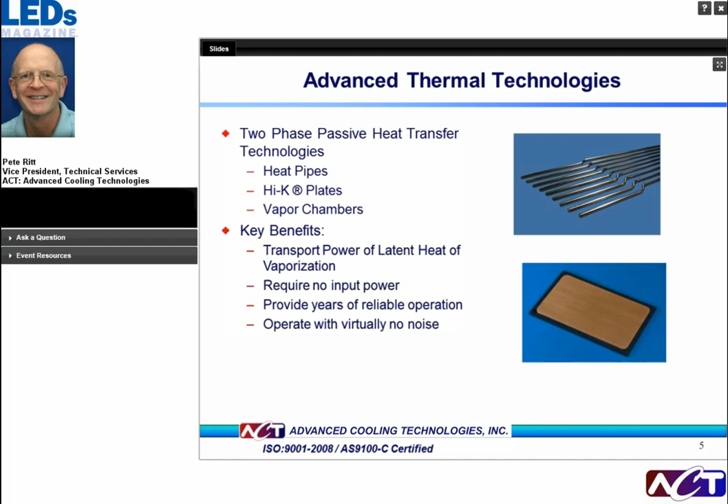First, we'll look at heat pipes. Heat pipes are sealed vacuum devices. They are housed in a metal tube. Inside the tube is a wick structure and a small amount of a working fluid. Most applications are copper tube, copper wick, and water as the working fluid. But there are several other envelope materials, wick structures, and working fluid combinations.

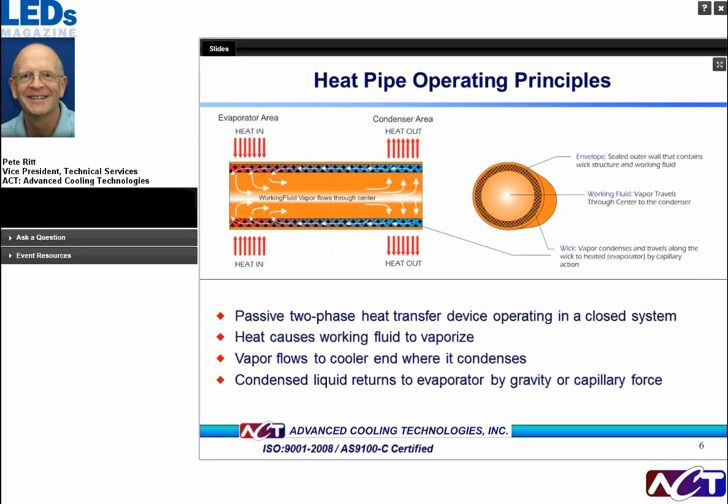So now that we know a little bit about heat pipe operation, let's look at how this can be put to use. First of all, with different combinations of envelope materials, wick structures, and working fluids, heat pipes can be used over a wide temperature range, from cryogenic to liquid metal, from -150 to 1500 degrees C. Because they are sealed vacuum devices, some working fluids can operate well beyond their nominal boiling point. Water, for example, can be an effective working fluid from 20 to 250 degrees C.

By controlling the amount of working fluid and selecting the appropriate wick structure, heat pipes can restart operation after freezing. They are freeze-thaw tolerant. Also, with the right wick structure, heat pipes can operate against gravity. That is, heat pipes can transfer heat downward. Typically, heat pipes can transfer heat around 8 inches against gravity, although gravity-aided operation is generally preferred.

In terms of advantages, since boiling and condensing are occurring at the same time, heat pipes can have an effective conductivity of 10,000 to 20,000 watts per meter Kelvin. We can contrast that with copper, an often used conductor, which has a conductivity of around 400 watts per meter K. Other advantages include continuous passive operation, excellent isothermality characteristics, and quiet operation. In terms of heat flux capabilities, heat pipes can operate with heat fluxes up to 50 to 75 watts, with custom heat wicks up to 500 watts per centimeter squared.

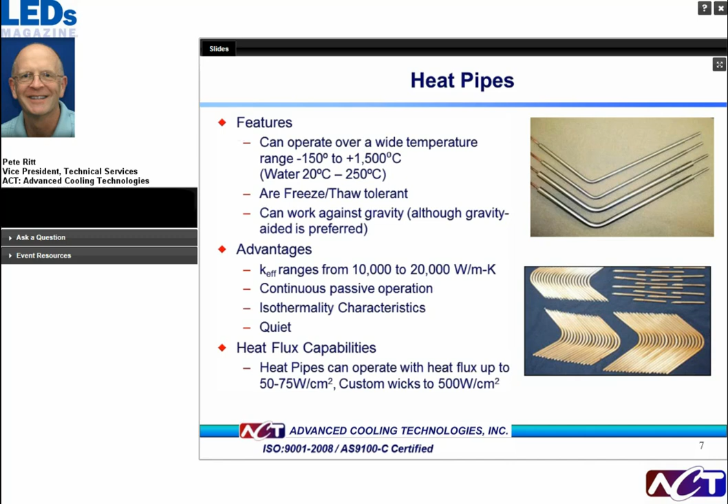So when should one consider using heat pipes? Heat pipes offer performance benefits in two main areas, heat transport and isothermalization, with heat transport including heat spreading. Heat pipes should be considered anytime high conduction gradients are a major portion of the thermal resistance. Removing waste heat that builds up on electronics components is the classical application for heat pipes and can be directly applied to LED devices as well.

In terms of benefits, heat pipes can be used to reduce the thermal management system size by providing more efficient heat transfer. They can also reduce system weight. Heat pipes are evacuated metal tubes which are lighter than similar sized metal rods. They can reduce required power. Heat pipes themselves require no power to operate and can decrease system hotspots without need for a pump.

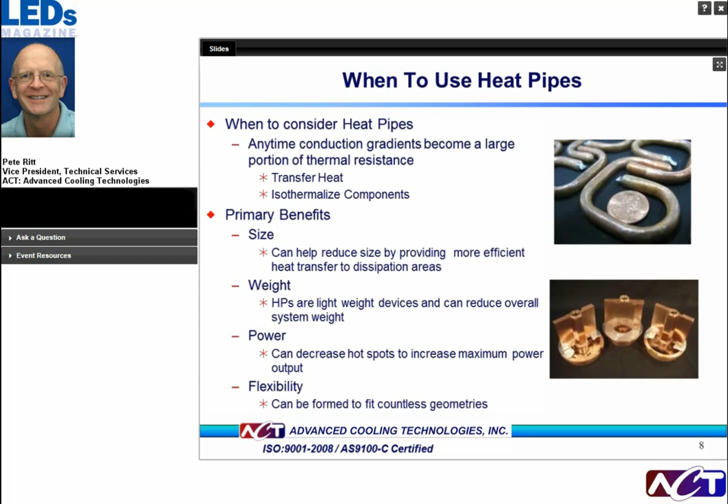Additionally, heat pipes can be used to move heat away from the inside of an enclosure to the exterior without subjecting the components to the outside environment. This solution can be implemented to dissipate heat from LEDs in sealed packages.

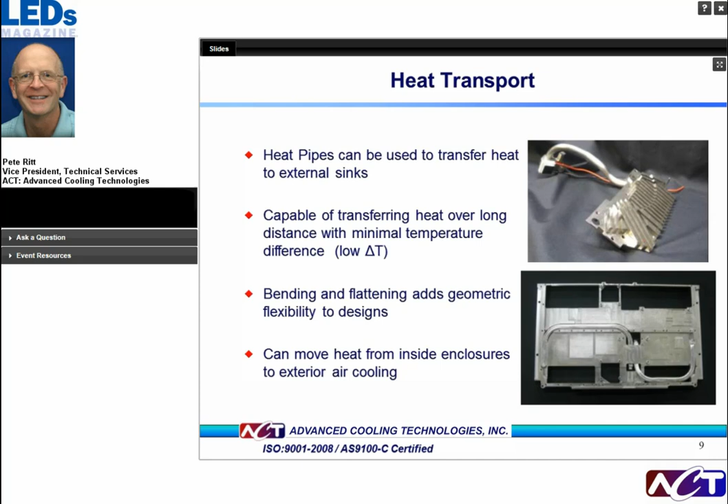The other major transport benefit of heat pipes is heat spreading. One specific embodiment of that feature is the Hi-K plate. Hi-K plates are aluminum conduction plates with heat pipes embedded in them. Aluminum has thermal conductivity of 200 watts per meter K. Typical thermal conductivity for aluminum Hi-K plates is 500 to 1200 watts per meter K, depending on the number, diameter, and location of the heat pipes.

High K plates, termed that because of their high thermal conductivity, can be used to reduce hotspot temperatures by moving or spreading heat to less critical areas. They can serve as enhanced conduction-cooled cold plates. They are fully compatible with either liquid or air-cooled chassis. They can be used to improve fin efficiency and lower fin weight.

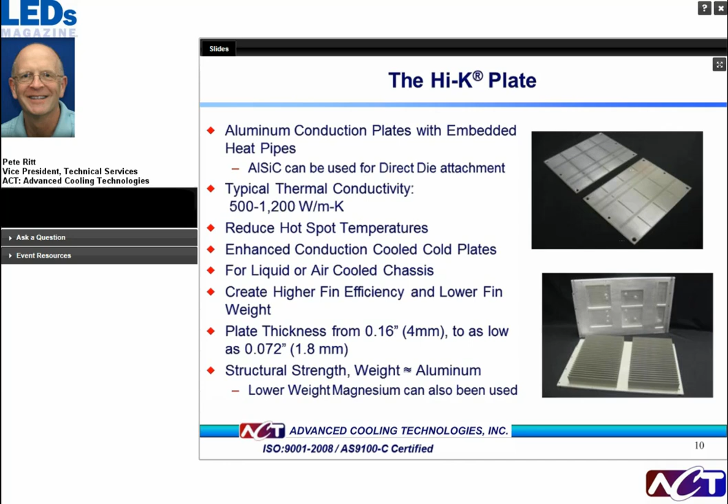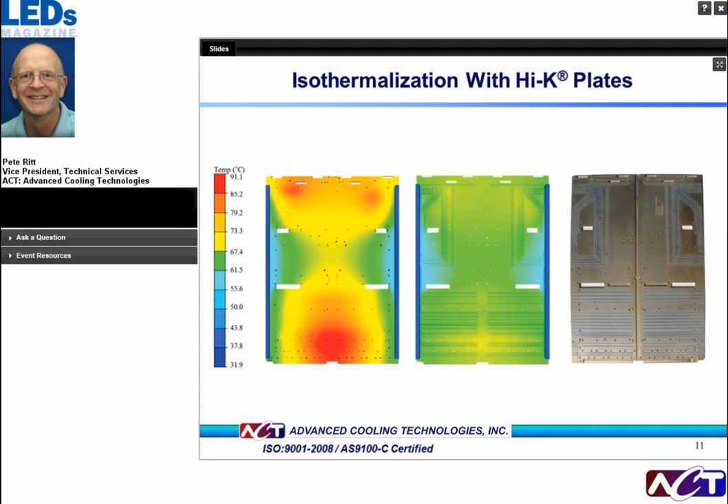Pictured on the right is the actual plate with the heat pipes embedded in it. The heat pipes can be seen as silver lines. This technology has many heat transport and heat spreading applications and certainly could be considered for improving thermal management for LED arrays.

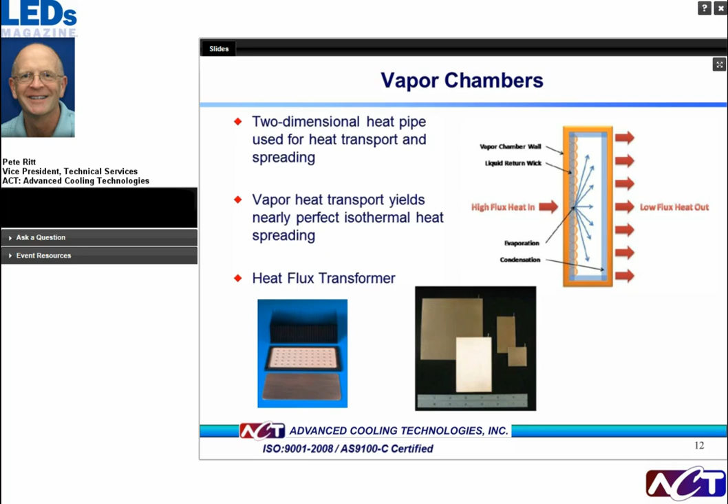Thank you, Maury. Now that we've learned a little bit about heat pipes, HiK plates, and vapor chambers, it could be useful to examine exactly how these technologies could be used as part of a thermal management solution for LEDs. In the following, we'll look at 5 different LED applications where they can be beneficially implemented. The first is the remote sink.

In many lighting applications, the LED device must fit in a fixed space to accommodate a variety of customer requirements which usually exclude thermal management considerations. A common example is a luminaire design where the ceiling or wall fixture are based on pre-existing designs using non-LED technologies. These designs commonly have both restricted space for heat dissipation through conduction and limited airflow to remove heat via convection. In cases where there is space to remotely dissipate the heat, heat pipes can be used to transport the heat from the device to a heat sink located elsewhere. This is called the remote sink.

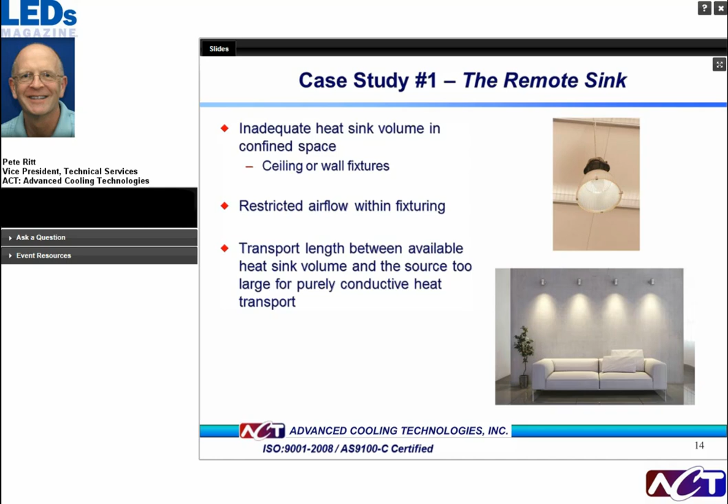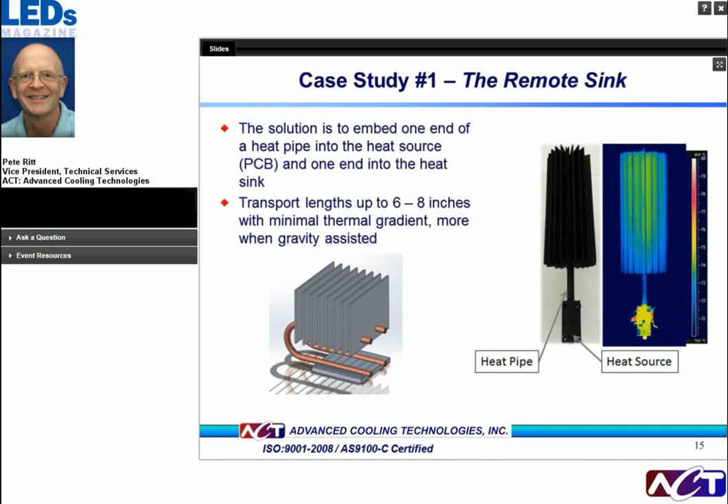In the example on the right, a single heat pipe is used to transfer heat from the source on the bottom to the heat sink above it. A thermal image on the right shows heat being transferred from the hot yellow LED device to the blue, green, yellow heat sink above it. The presence of the green and yellow within the heat sink shows that the heat pipe is effectively transferring heat from the device to the radial heat sink fins. Heat pipes can efficiently transfer heat approximately 8 inches against gravity with minimal thermal gradient, and even greater distances when gravity assisted. Note that the number, size, shape, and location of the heat pipes would be specific to that design.

Case number 2, extrusion isothermalization. In some cases, it is not possible or desirable to have a heat sink in a remote location, bay and/or outdoor lighting products, for example. Frequently, large extrusions, typically made of aluminum, are utilized. Heat dissipation occurs through conduction, resulting in large temperature gradients across the heat sink structure, with the highest temperatures found closest to the LED heat-generating source. As we have mentioned, the excess temperature has a negative effect on LED device life and performance. What can be done to mitigate this?

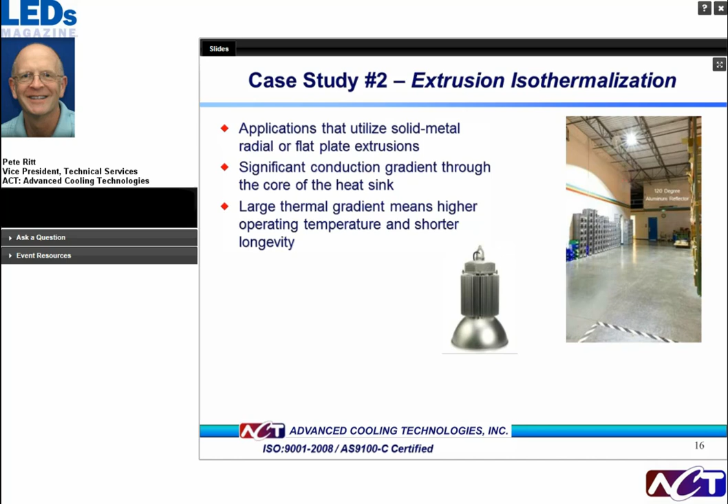We talked earlier about how embedding heat pipes in an aluminum extrusion can be used to more effectively spread heat in that structure. The same benefit can be realized by inserting heat pipes into these large heat sink extrusions. The heat pipes themselves will isothermalize. By doing this, they will spread the heat through the heat sink. This heat spreading reduces the thermal gradient and likewise reduces the max temperature at the LED source.

Benefits can be taken in different ways, such as one can run the device at a desired higher temperature and reduce the risk of overheating, or one can reduce the overall size of the heat sink. Our testing and analysis has confirmed that the longer the extrusion, the more benefit from the presence of heat pipes, principally because of the larger available area.

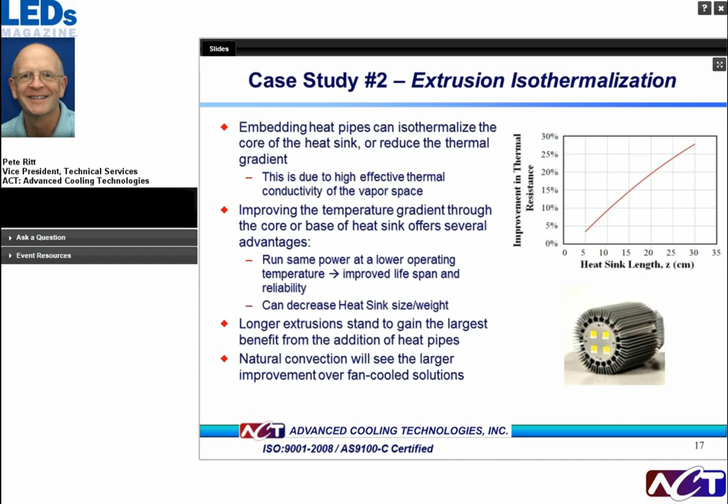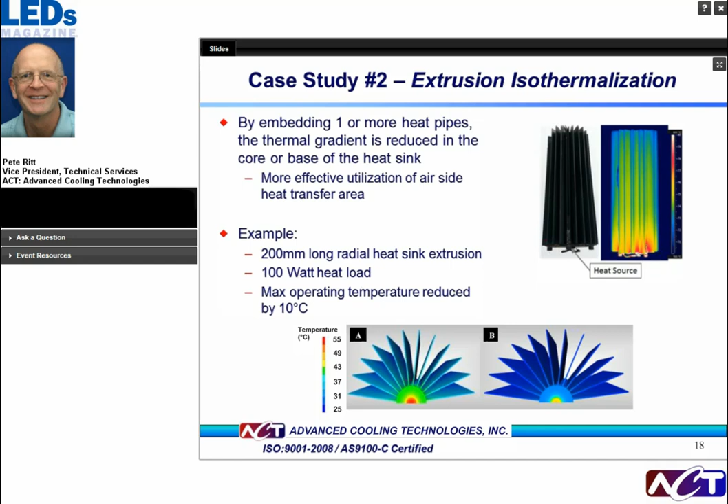The third case, heat sink size, weight, and power, again uses embedded heat pipe, or high K plate as we call it, but takes the benefit in a different way. It is well known that placing a discrete heat source on a large metal heat sink will produce large thermal gradients as the heat slowly conducts and dissipates heat to the external fins.

We have also discussed in this presentation that embedding heat pipes can increase the thermal conductivity from around 200 watts per meter K to 500 to 1200 watts per meter K, offering the opportunity to reduce heat sink plate thickness and fin area. This approach can be implemented in a variety of LED applications, including large arrays, outdoor lighting, as well as some downlighting applications. Let's now look at what kind of benefit we can expect.

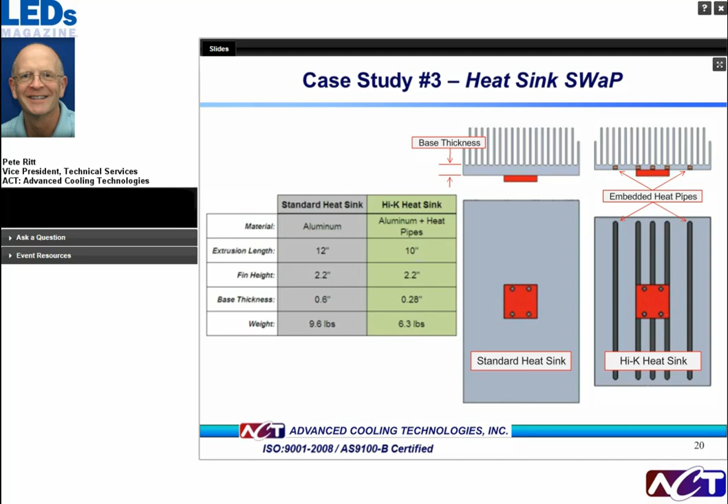The next example of passive heat transfer technologies for LEDs is directed close to the source of heat. Obviously, it is advantageous to dissipate heat as close to the source as possible. This can be difficult as electrical isolation requirements must be satisfied, otherwise the device will not function. Unfortunately, in many cases, electrical isolation is only achieved using materials that are thermally insulating, such as with FR4 boards.

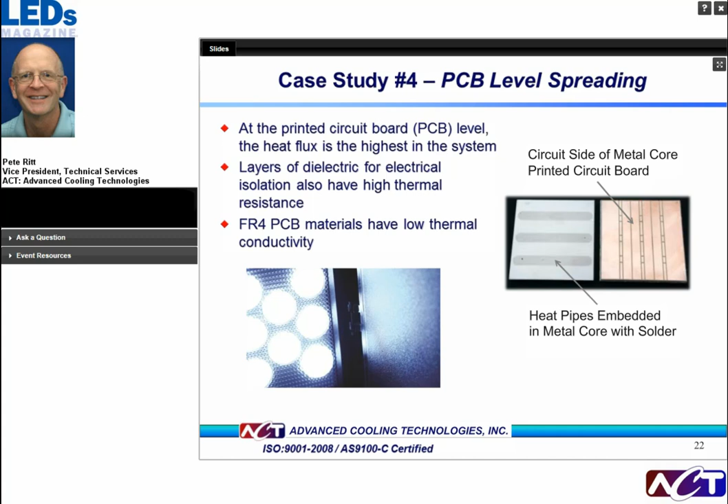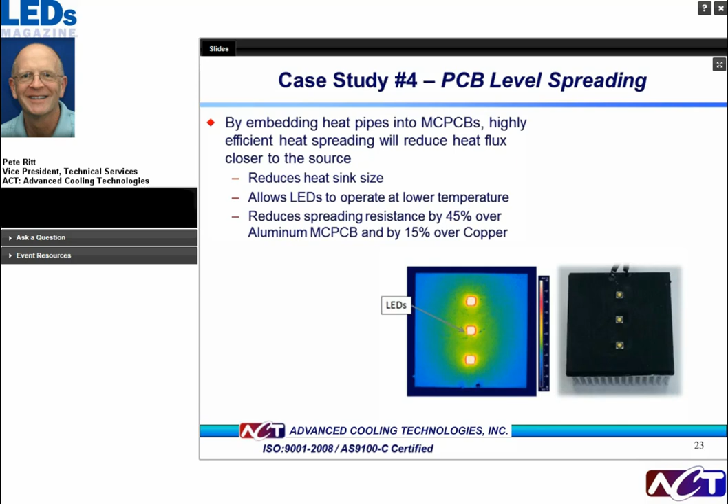Our final example is for a growing number of high-power LED applications, such as UV curing devices. These products typically use high power, requiring dissipation of hundreds of watts, but must maintain a tight temperature range so that the output optical wavelength remains constant.

The problem is further aggravated because an additional thermal interface layer is needed between the heat source, typically made of some low thermal expansion semiconductor material, and the heat dissipating device, usually copper or aluminum, which have much higher coefficients of thermal expansion, CTEs. Typical interface materials include thermal gap pads and thermal paste. Without such a thermal interface layer, the different materials' coefficient of expansion will result in the heat source device cracking or severing from the heat dissipating device.

Unfortunately, the presence of this thermal interface layer increases the overall thermal resistance and likewise increases the temperature on the LED device. The thermal management solution is analogous to some laser diode applications, and fortunately, the solution can be the same as well. Let's look at this in more detail.

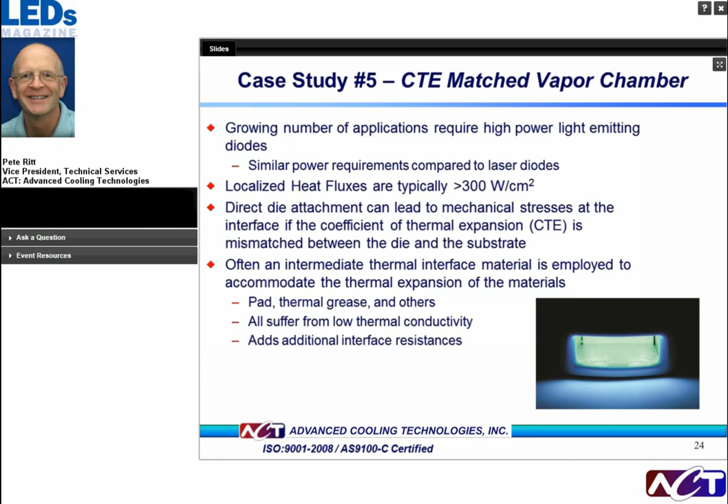With both heat pipes and vapor chambers, it is most advantageous to have water as the working fluid for both cost and performance reasons. Copper has been shown to have excellent compatibility with water, but copper has a relatively high CTE and would be thermally mismatched with common high heat load LED devices and would require a thermal interface layer. Additionally, conventional wick structures have limited performance capabilities which may not always satisfy requirements for high heat load devices.

The desired solution is to have a water-compatible vapor chamber that is CTE matched to eliminate unnecessary thermal barriers and has a wick structure designed for high heat flux devices. Such a device is available and has been called the CTE matched vapor chamber. This unique device has been demonstrated to dissipate heat fluxes as high as 700 watts per centimeter squared and 2 kilowatts overall. The overall envelope structure is aluminum nitride with direct bond copper exterior.

The copper on the inside of the vapor chamber ensures the well-known copper-water performance is maintained. In areas where the heat source is to be attached, the copper layer is removed, exposing the aluminum nitride. Aluminum nitride has a CTE of 5.5 parts per million per degree C, much closer to common semiconductor materials. Devices can be directly attached to the vapor chamber, eliminating the need for a thermal interface layer.

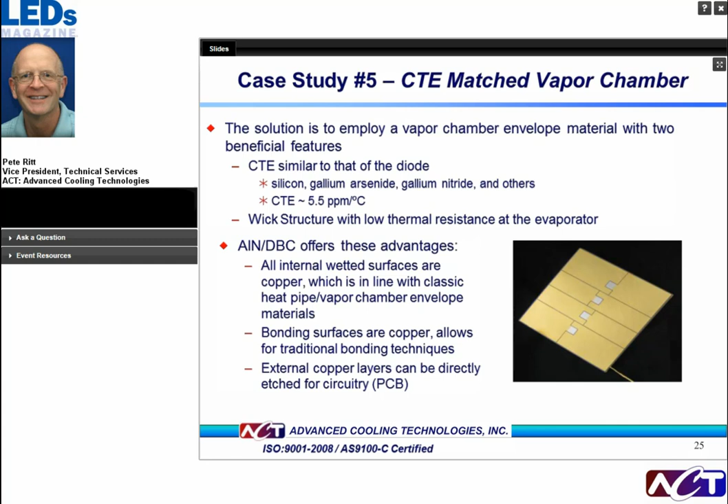Additionally, there is a unique wick structure located at the heat source. It is a combination of very thin and very thick wick material co-located at the evaporator. The thick wick collects the condensate returning from the condenser portion of the vapor chamber and delivers it to the thin wick area. The thin wick quickly evaporates the fluid, achieving very low thermal resistance values.

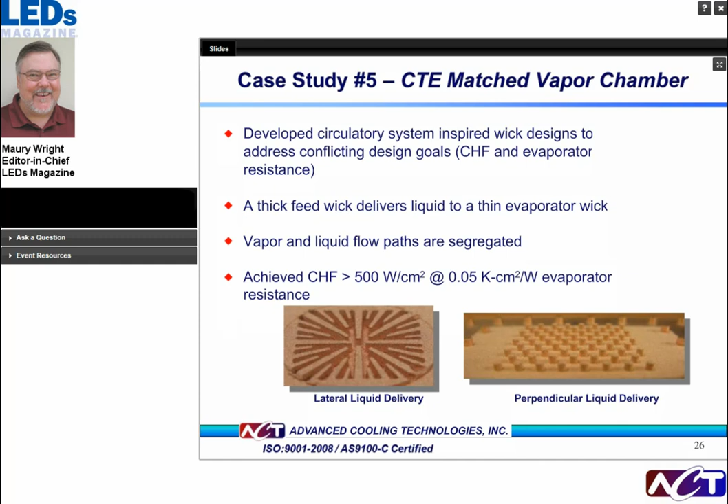In summary, as LED devices become more accepted and more prevalent, customers are requiring higher performance products in smaller package sizes. This puts an increased burden on thermal management on LED device designers. The conventional metal heatsink solutions will continue to be implemented wherever practicable, but are more frequently found to be insufficient for a variety of performance and size reasons.

Fortunately, there exist passive two-phase heat transfer technologies, heat pipes, HiK plates, and vapor chambers, that have provided many successful examples of thermal management solutions in the CPU and broader electronics industry. Those same technologies can be applied to many LED devices as well. We presented today 5 examples of how heat pipes, HiK plates, and vapor chambers can be implemented to solve real LED thermal management issues.

The remote heatsink demonstrated the heat transport capability of heat pipes. Heat can be effectively moved 8 inches away from the source against gravity, and even more when gravity aided. The extrusion isothermalization showed how heat pipes can reduce the peak temperature, 10 degrees in the example shown, by spreading the heat more efficiently across the heat sink.